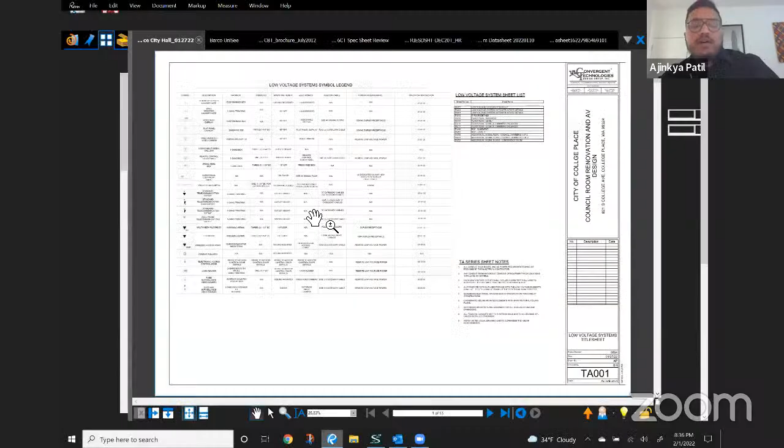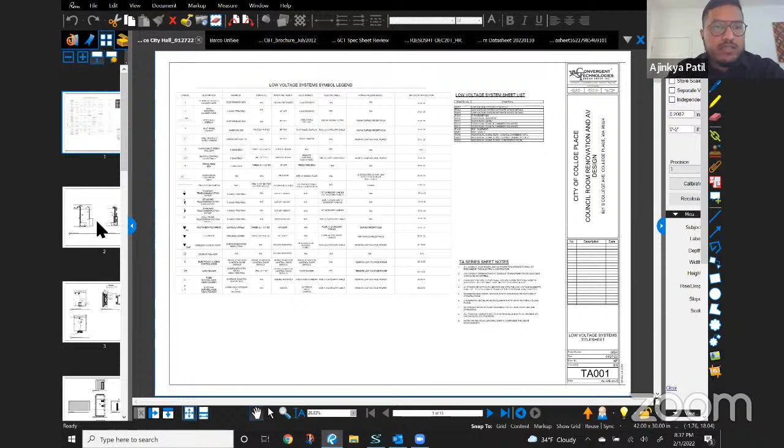Yes, these are the progress plans we currently have. We're calling it the 60% set, so there's still some back and forth and review process remaining until we finalize the AV design. Today I'd like to walk you through the technology upgrades we're planning for this building, giving a brief overview without getting too technical, but covering all the key features and elements planned for this space. I'll flip through some sheets.

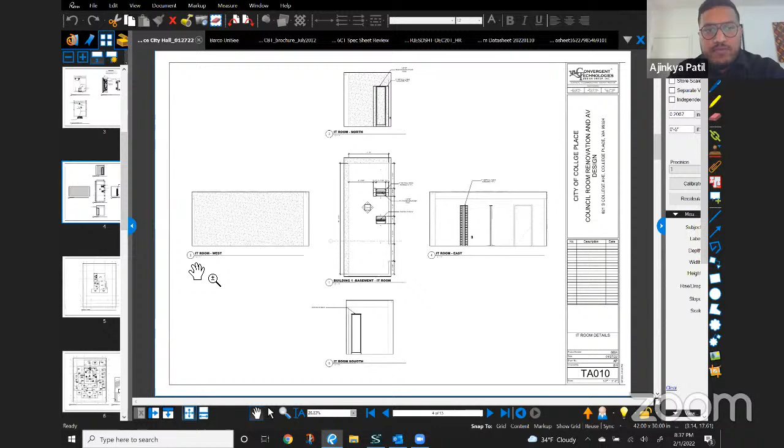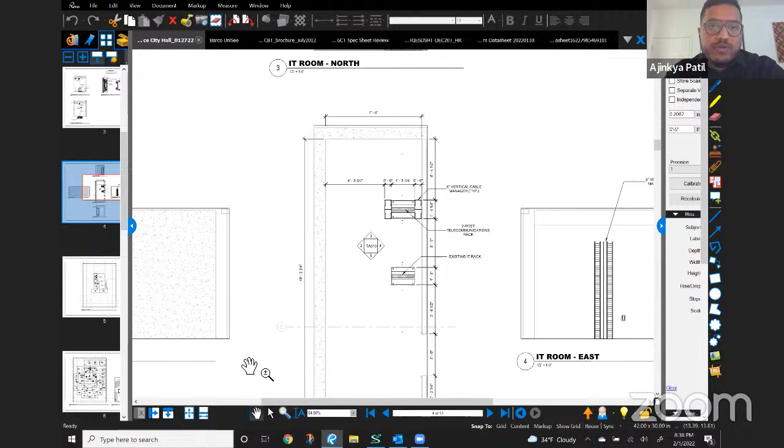Initial drawings show what we call infrastructure details—how the devices, cabling, and everything would be mounted. This is the basement of the council chambers. As far as technology upgrades in the basement, we're planning new telecom data cabling in the office space, storage spaces, and training rooms. We're also planning to upgrade the existing telecom room to support all the new cabling, up to the latest Category 6A cabling standard we're planning for this project. This is the telecom room with a few details regarding that.

For this project, we're planning to add new telecom cabling to all the offices and surrounding spaces across the council chambers, which would support cabling for computers and phones. We're also planning for wireless.

Mr. Patil, could we interrupt real quick? We have a council member who has a question—can you zoom in a little more? I realize we won't be able to see, I couldn't read anything. Thank you. No, good point—I was trying to keep it big and then get into individual spaces, but that's fine too.

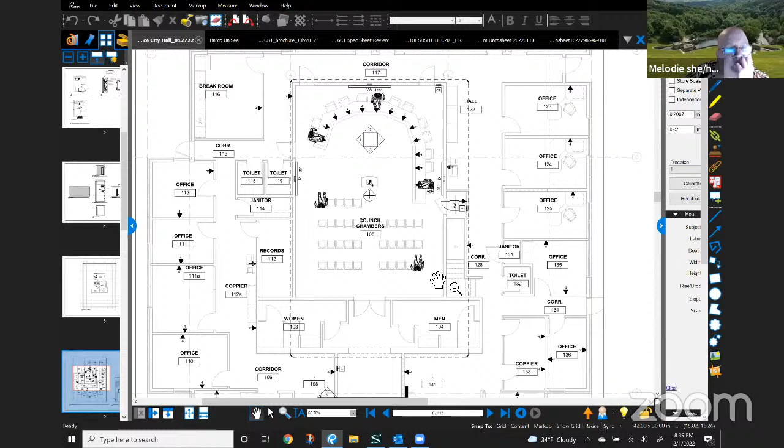As part of the technology upgrade, as I was saying, we're planning new cabling in all the office spaces to support your phone and computer systems. We're also planning to upgrade the Wi-Fi capabilities within the space by installing new wireless access points, so you guys will have better wireless service.

The key focus for the AV technology upgrade is obviously the council chambers itself—that's part of what we call phase one. There's also an AV system planned for the conference room behind, which I believe is part of phase two. That being said, let's get into the council chambers itself.

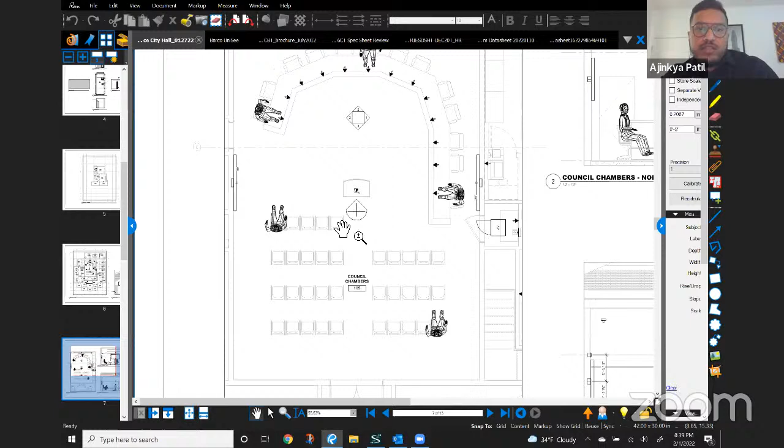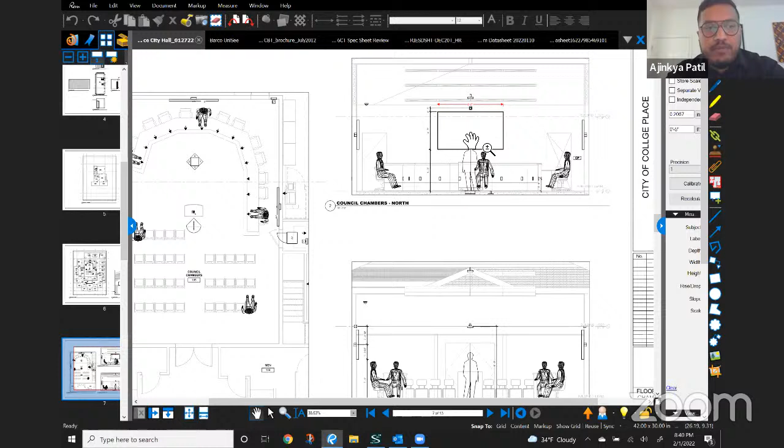Working along with the architects and coordinating the different architectural and MEP coordination for AV, what we're planning for this space is one large primary viewing surface, or video wall, in the front. That would be the main display showing your presentations, camera feeds, or any other slides you want to share. We're also planning two supplementary displays on the side, which can show either different presentations, different content, or share the same thing as the big wall—these side displays help people sitting in different areas get a better viewing angle. So these are the three main display surfaces within the space.

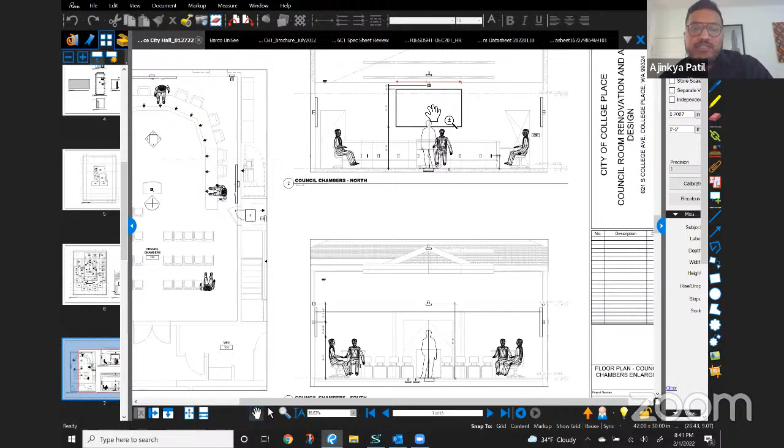The front wall, dimension-wise, is approximately 8 feet by 5 feet—it's actually 4 displays tiled together to form a large viewing surface. The side ones are 85-inch diagonal flat panel 4K displays.

For displays, we're also planning one within the lobby outside, shown on this sheet. This lobby, right as you exit, will have a display that acts as an overflow display if there's a large gathering and people are waiting outside. Any feed or presentation happening within the council chambers can also be shown on this exterior display—that's another viewing surface we're planning for the council chambers.

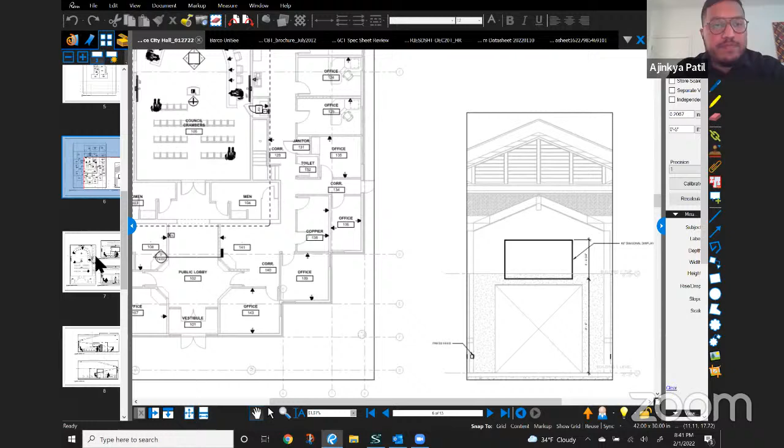From an audio perspective, we are planning for each of the council members' seats to get its own dedicated microphone. It would be a conference delegate microphone chairman delegate system, so you would have the ability to control your own mic and also have a small viewing surface so that any presentation shown on the large screen will also be shown in front of you. Each seat will have its own small display, which we're calling an individual display.

The clerk seat will have its own dedicated inputs and multiple monitors to run the different sessions that happen within these chambers. That seat will also get its own set of control panel and inputs from an AV perspective.

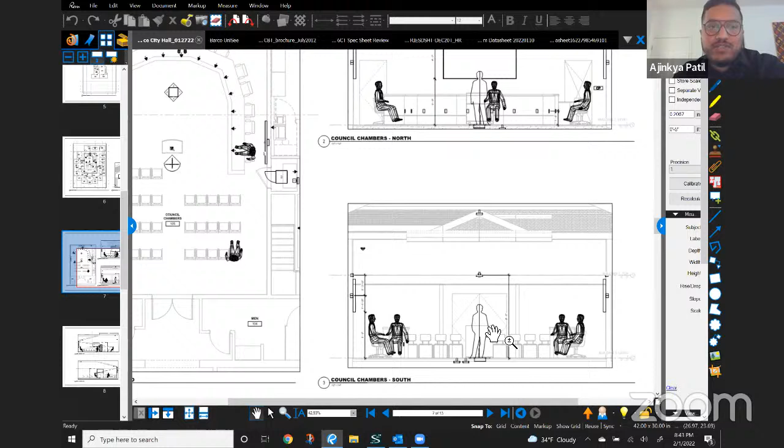In the middle, for someone standing there, we are planning for an integrated AV lectern. That lectern will have its own microphones and input source capability for someone to either present or talk standing at the podium. That podium is planned to be portable in nature, so if there's a scenario where you don't need that podium there, it can be moved out of the way, and we'll plan the infrastructure so the cables can just be disconnected and you'll have a floor box with a cover on it.

From an audio speech reinforcement perspective, we are planning for ceiling loudspeakers and also front wall loudspeakers, so that whenever someone is speaking, the speech can be amplified so everyone within the space can hear clearly. Also, if there's a presentation with audio playback, that can be heard through those speakers as well.

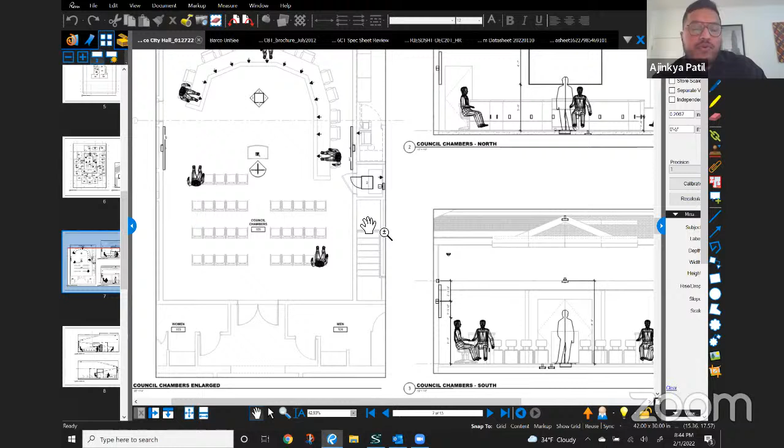For the AV system, we are planning on integrating a small AV rack, which will house all the centralized AV equipment so that it's out of sight and out of the way. It will have its own door, so that once the system is completely installed, you would not have to worry about it day-to-day. Only when it needs some sort of service or updates would you go within the AV rack.

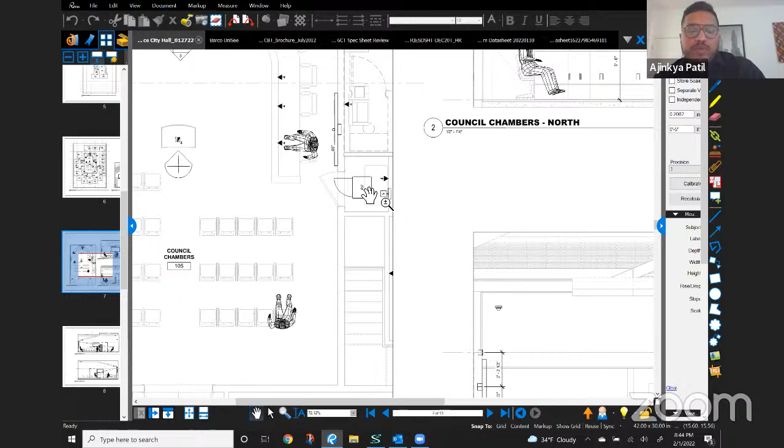For cameras, we are planning at least 3 cameras in this space, so we have multiple angles and different views for each of the council members. We are also planning to integrate video tracking technology within the AV system, so the camera automatically focuses on whoever is speaking. That is something also we are planning in our design.

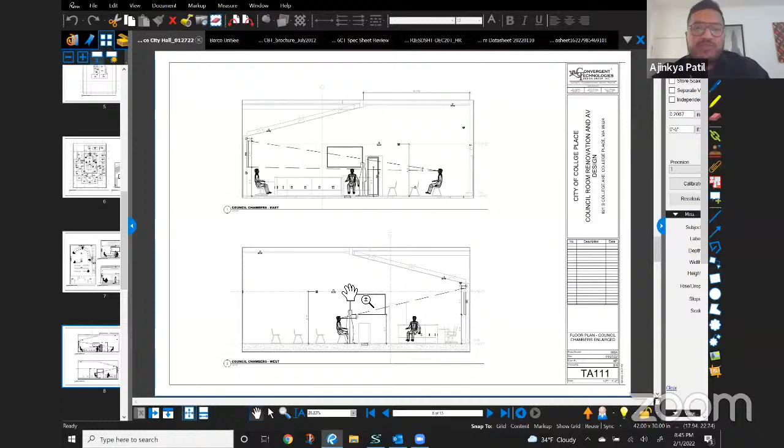What you're seeing here is something we call sightline analysis, which we do as we develop these designs. We make sure the displays are mounted at the right height so no one coming in front of a display or sitting at the back gets interrupted by someone sitting or standing in front of it. We also ensure the displays are mounted at the right height so nobody has to strain too much to look up high or otherwise. We keep all those things in mind as well.

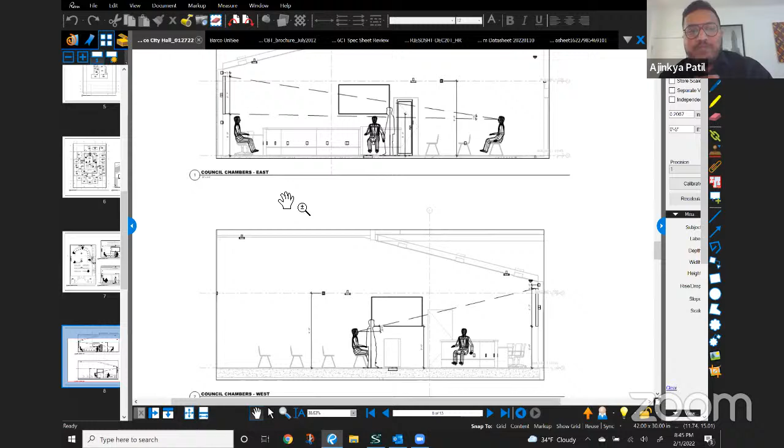The main functionality that the AV system within the space will allow is the ability to present, including wirelessly. So someone with an iPad, laptop, or phone should be able to, with authorization, connect to the AV system within this space. You would also have the ability to stream and record any of your sessions. These were a few pointers given to us during the AV design user group meetings to work the design around, so the AV system would be functional and capable of streaming and recording as well.

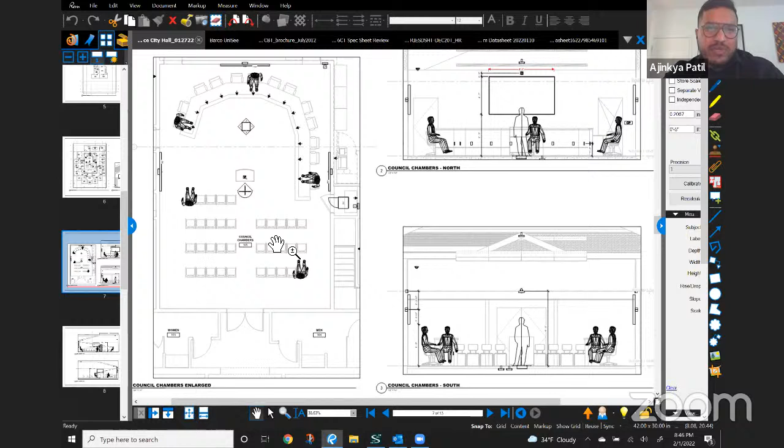Any questions up to this point as far as the council chambers? Any questions? Oh, Ms. Selby.

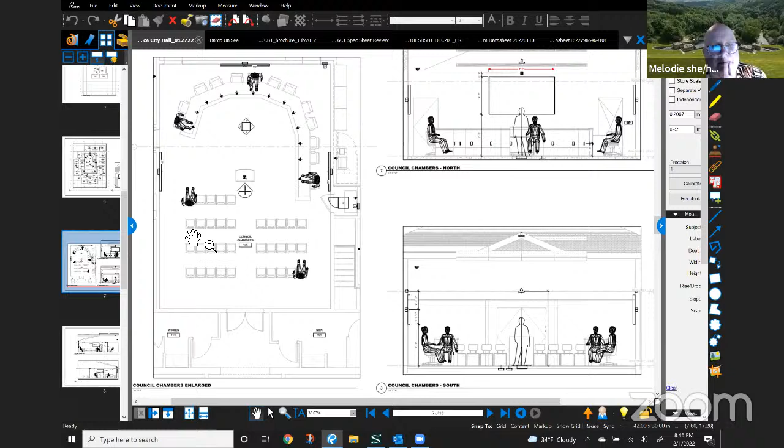This sounds great. The council seats, I've seen them sometimes rearranged for different meetings. Will these be fastened in place, or will they still be able to be rearranged?

That one's probably more for me. The dais is intended to be built in place. This was a uniquely shaped space - given the amount of space we had and the amount of seats we needed to fit, we couldn't really find a store-bought item that was going to work, frankly, and have proper exiting spaces, room behind the seats and all that. As you can see, it already takes up quite a bit of room. So no, these are not designed to be moved, the dais or the semi-roundish seating.

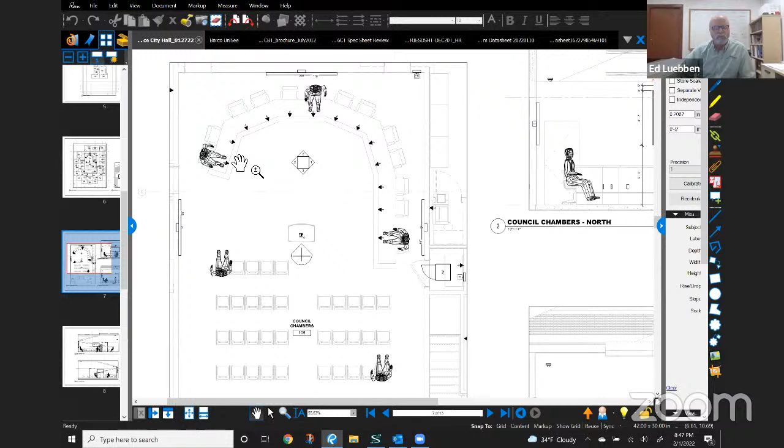But there are portable chairs out on the main floor, so chairs and tables could be set up there for workshops. Okay, thank you, I think that's fine, I just wanted to know which way it was.

And as far as the individual displays, will we be able to zoom in and out of those ourselves so we can zoom in on one piece or something? That is correct.

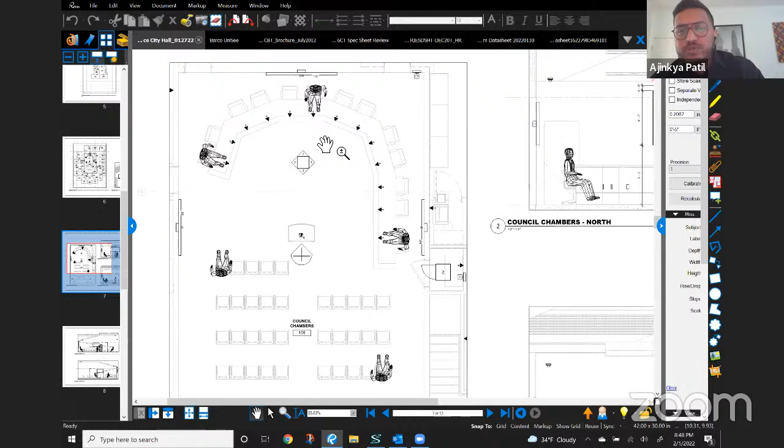During the user group, we had the discussion about the displays. Right now, the individual displays would be controlled by the clerk, so any content being shown on the displays is controlled by the clerk, but you should have the ability to individually zoom in or zoom out of any documents you might be seeing. So you should have that ability.

Are the audio systems we're getting going to be compatible with hearing aids, where people can tune in somehow on their hearing aids? That is a great point. Yes, we are planning for an assisted listening system for this space. Anybody with a hearing deficiency, we are currently planning for an IR-based assisted listening system. You will have receivers distributed if and when those are required, and that person can just use that receiver to engage with whatever audio is being transmitted in the space.

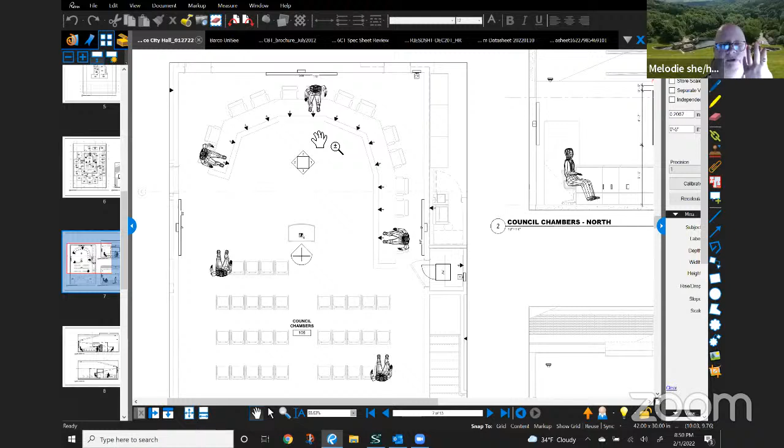That's good. I don't know much about it, but I would like if we could find out more about working with hearing aids, because I know there is a way that if you already have hearing aids, the IR things sometimes don't work that well, and certain audio systems work well with them and certain don't, but that's as much as I know. I just want to make sure that as much as possible, anybody can have access, equal access. That's great feedback. I know there are these telecoil systems that kind of work inherently with hearing aids, so if that is a requirement, we can definitely integrate the assisted listening system to be compatible with those. I don't want to double the cost of it if that's what it takes, but I do think it's something we need to look into. Thank you.

Councilman Peterson? Yeah, it sounds like a really sophisticated system, so I have a kind of basic question. Many times we go into executive sessions and have to kill the output, and then many times we have to communicate out that we need an additional allotment of time. So obviously that's being built in or thought about as far as a quick kill switch, rather seamless communication in those types of scenarios.

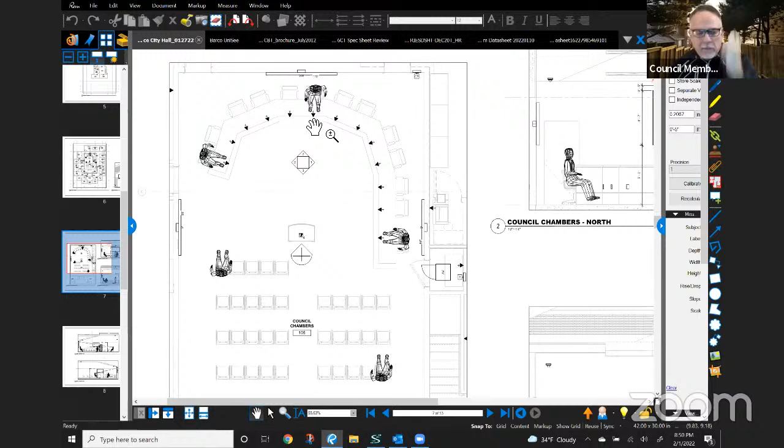Yeah, absolutely. The way we are designing the system, it is really flexible. We are planning for two main control panels or touch panel control surfaces, one at the clerk's desk and one as you see here behind. They will have integrated presets, either a single push button turning on the system, or if you want to generally mute all the microphones or kill all the video feeds, you can have dedicated buttons so with a single press your AV can be cut out from the exterior world, or if you want to mute internally, you can do that as well. Thank you.

The way we are writing the spec and what we are expecting from the AV contractor, once the contract documents go out and we have an AV integrator on board, is that creating that touch panel user interface needs to be an iterative process with the end users for this council chambers. So you will have multiple chances to review the look and feel of that touch panel, so it's not just something the contractor provides. It is what you guys actually want.

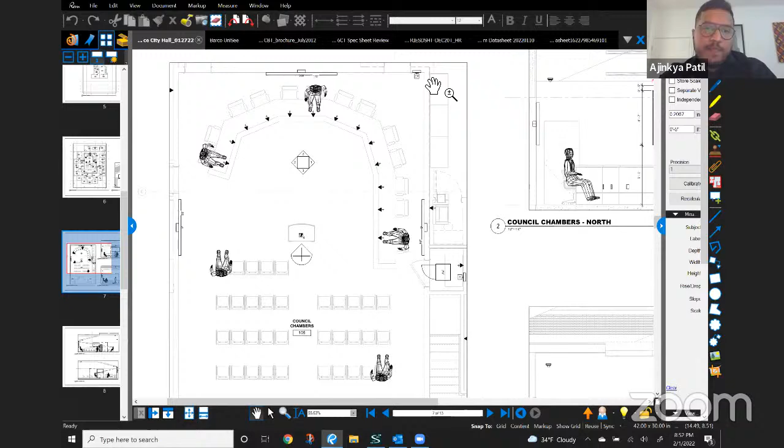One thing I missed: in the lobby itself, we are also planning for a sort of press feed. That would be physical connections on the wall in case there's a scenario where there's an OB van or a broadcast type requirement, so that a feed from within the council chambers is required outside. We are at least planning for that infrastructure so you can get the video and audio feed from the lobby, and nobody has to come all the way into the room running long cables.

The lobby would also have ceiling mounted speakers for overflow audio, in case there's a large gathering or session and people standing in the lobby can still hear what's going on inside. The way we are designing it, it is on its own separate zone, so you turn that on only if it's a requirement, and if you just want to keep the session within the chambers, that can be done as well. The lobby speakers can be segregated.

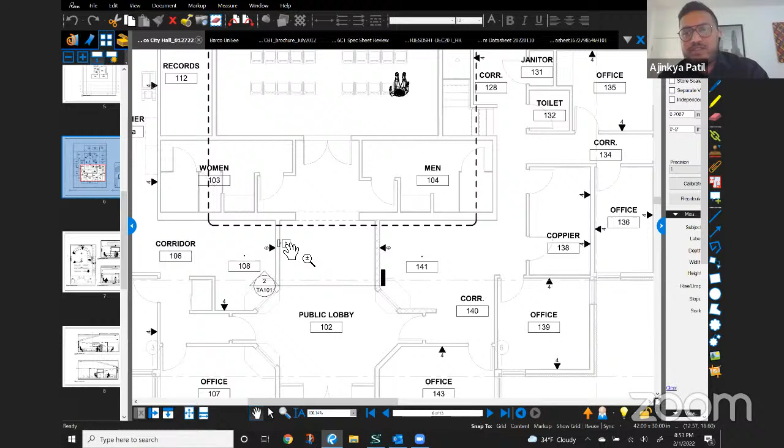Any other questions with regards to the AV in the council chambers? I wanted to quickly touch base on the conference room as well and what we are planning for that. I do not see any other hands raised, so thank you.

I think I had one question. How will the system integrate with Zoom and our board docs? With Zoom, it should seamlessly integrate. We are planning for all the AV feeds to go through an AV bridge that integrates the HDMI, SDI, and line level or mic level audio into a single USB feed. That would connect to a PC within the AV rack, which is the computer the clerk controls or runs Zoom meetings on. It would detect it as a microphone and camera, and you'd still be able to pick and select which camera goes to the Zoom session.

Great. So for conference room 120, as I said earlier, this is part of phase two, but we are planning for a straightforward and easy to use conference system with a single large format display up front, along with a wall mounted camera in the front and ceiling mounted loudspeakers and microphone, so you can have your regular Zoom meetings or sessions in there.

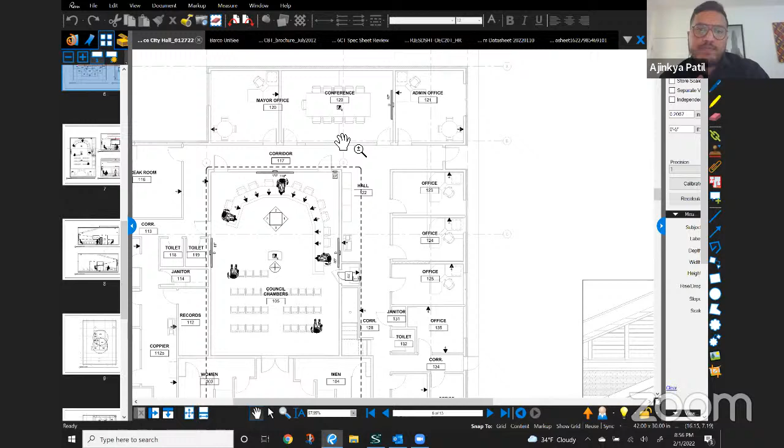We are also planning to provide cabling infrastructure for new security cameras in this building, which is something we are capturing as part of this technology upgrade. Those security cameras would be primarily on the exterior and in the lobby, but not in individual offices. Glad about that.

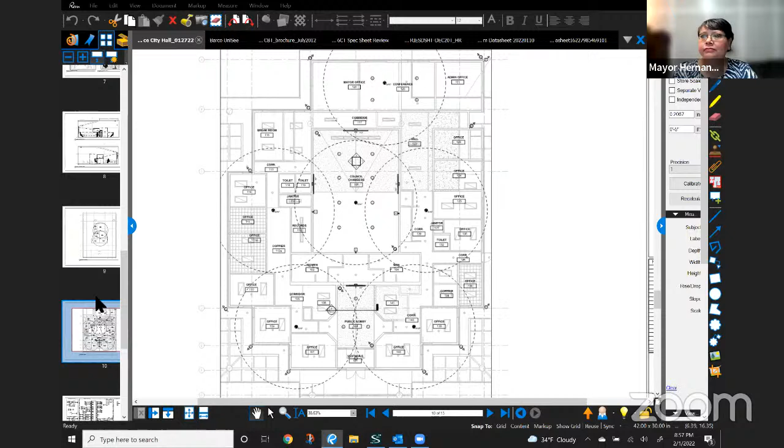So, will it be a problem if -- sorry, I'm trying to figure out how to say this. Right now we have our Chromebooks so that we can look at other stuff that's on board docs rather than what's being displayed right now. Will those still be able to be part of the system and be plugged in, or would that overload it?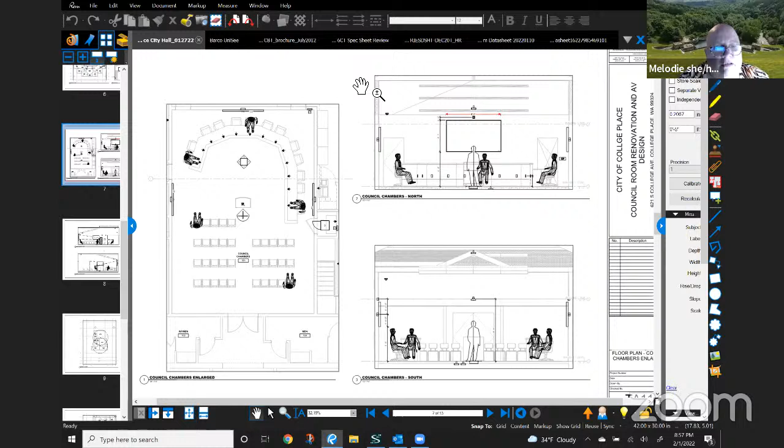I would still think you'd be able to use your own Chromebooks with BoardDocs, if I'm correct. We are just not planning for any individual inputs at the station. So if you want to share from your laptop, we are not planning for that, unless that is a requirement -- you guys can let us know and we can include that ability as well.

I don't see the need to share, but I do sometimes like to go back to maybe a couple meetings back, or what did we do last year. I don't expect Lisa to pull that up and show everybody -- I'm just trying to see if I can answer some of my own questions or remind myself.

So my second question, and this may be irrelevant in this day and age, but do we have the ability to bring in TV, like if there's breaking news or documentaries, or whatever, sometimes we want to bring in TV to conference rooms, etc. Does that all just come over the internet now? So as long as we have internet, we have that?

I think so, that's the main plan. If you guys have any IPTV subscription, we can definitely pull that up. If you want to plan for a dedicated coaxial TV tuner like a Verizon box or something, we can plan for that as well. Jon, do you have any feedback on what you guys want to do for this?

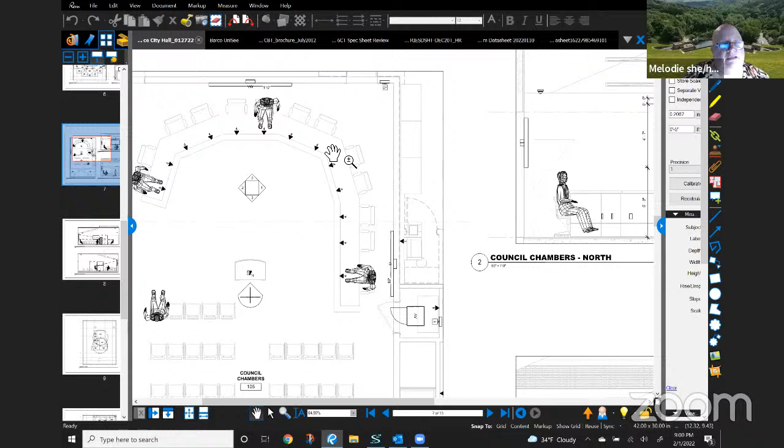No, we still see those TV tuners. A lot of buildings still have physical coaxial connections for TVs. So yeah, that's a great suggestion, we'll make a note of it.

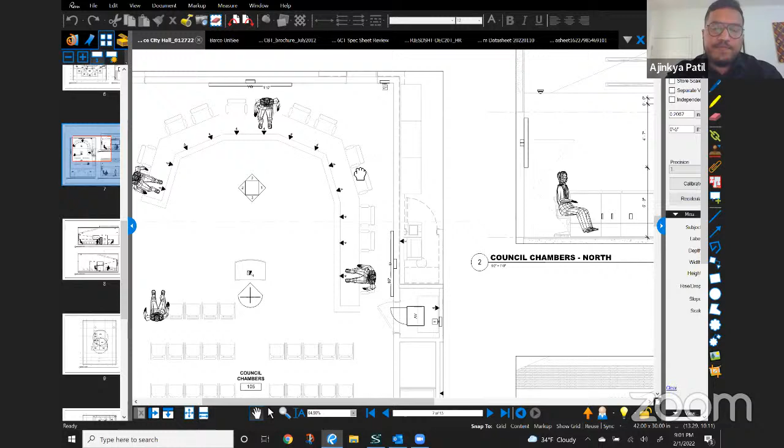Okay, well thank you, Ajinkya. I think, Ed, if we want to go ahead and turn it over to you. Do you want... one thing about...

I am not very technologically inclined, and so I don't know how to share a screen. So I sent those drawings that way. I'm hoping maybe I just have, well, just a few. I can share my screen.

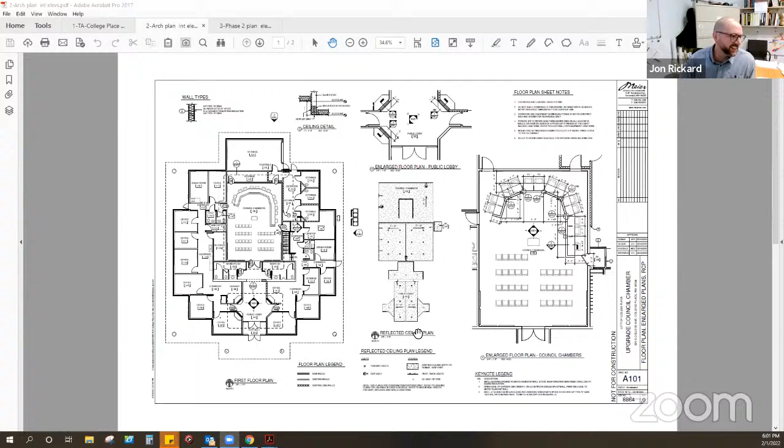This is why Ajinkya is designing that part and his team. You just need to tell me what you want the audience to see. Yeah, that's fine, it's a lot of this you already saw on Ajinkya's screen. I'll just do a real quick overview for phase one, and that's what we have.

We have two drawings that we're sharing tonight that are part of phase one. There's a whole bunch of other drawings that are details and mostly boring for most people, but phase one is we're going to put new carpet and paint, patch some holes in the ceiling because we're going to be redoing the lighting. You might go to the ceiling where you're at right now.

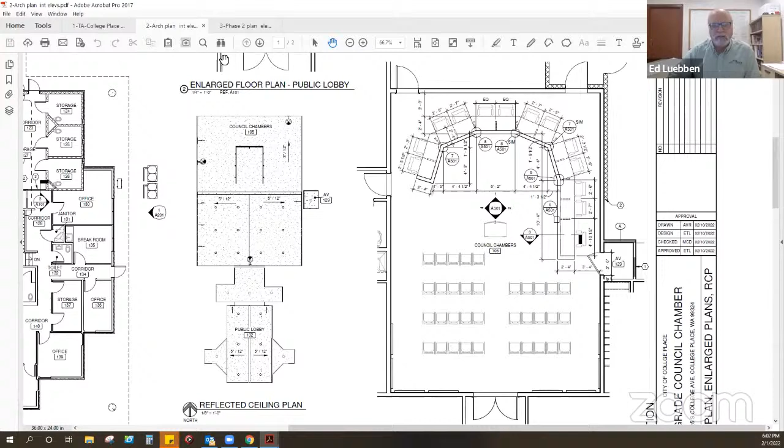That'll be good. This is just a ceiling plan for the lobby and the council chambers. We're going to have the little round circles at the back half of the council chambers, and then in the lobby, the darker circles, not the light ones by the restroom.

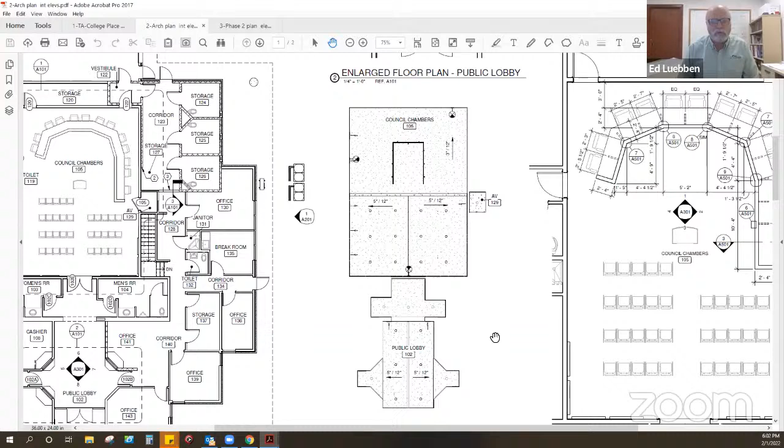Those are going to be kind of long tube pendant type lights, but they light not just down, they light from the sides also. The whole thing is kind of a lens. And then for the council...

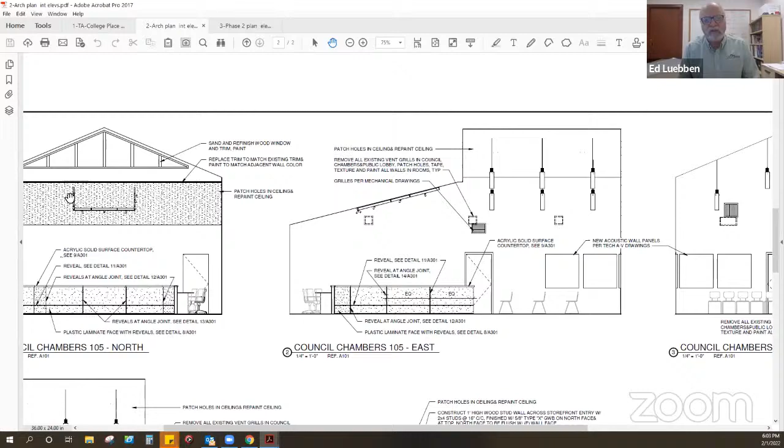Then that's this track lighting that mounts on the ceiling with spotlights, LED lights that kind of shine towards the council, the people at the dais, the council members and others.

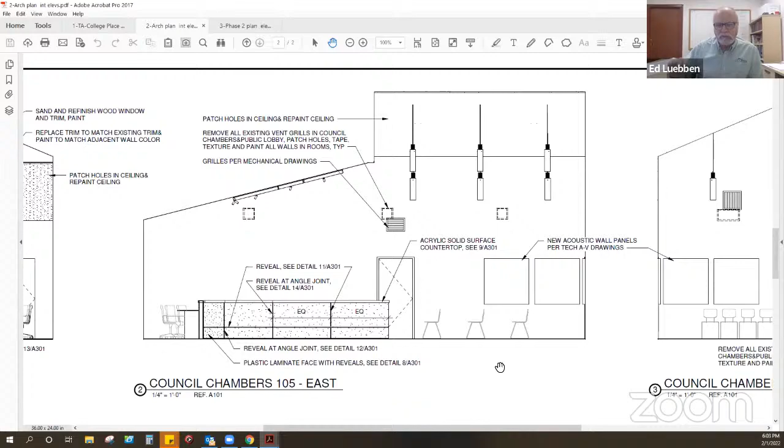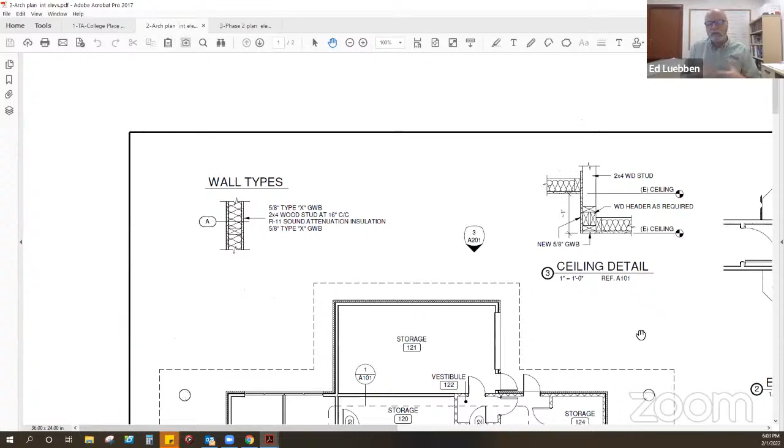And then the other thing that's not mounted here, that we're anticipating having, are little flexible tube lights, flex lights, there's probably a better name for them, on the dais desks around for each of the desk council members and others, so they can bend it and shine on paperwork if they need extra light for reading or whatever. So they'll have that task lighting at each council chambers.

Yeah, task lighting, and we'll have probably a similar task light. It can be mounted in place, or in this case probably one at the podium also, for lecturing there. So that's what's going on lighting wise.

The only significant architectural change going on is, again, we're doing new finishes. We'll talk about the lobby in a sec, but over there where the AV closet, room 129, you might be familiar, that used to be where people used to visit their family members in jail or whatever, or maybe attorneys would visit, I don't know which side of the wall the attorneys are on.

But one thing that John and Scott and others have asked us to do is we're also going to tear out a portion of where that door is that separates the jail from the corridor, 128 and 123 I guess on this drawing. We still call out storage 127, we didn't get it cleaned up, but that's gone. We'll be removing that where the prisoner would sit, or the inmate, whatever the proper terminology is.

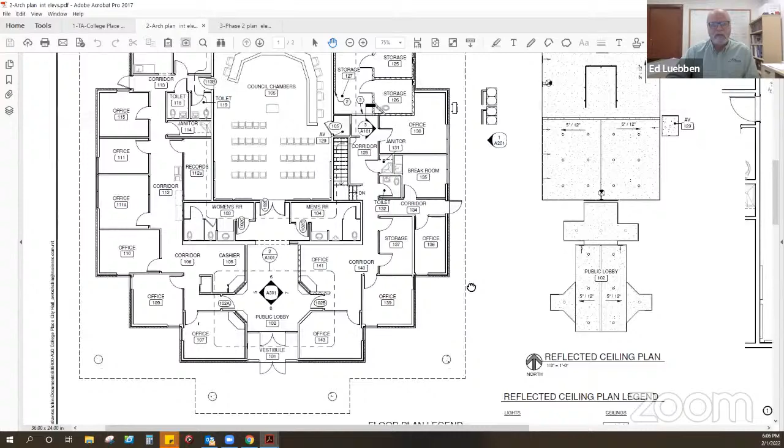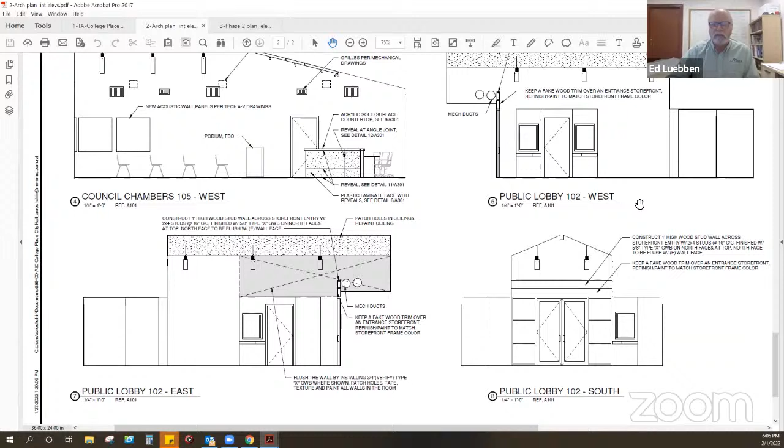In the lobby, the big thing there is, at each of the windows, the counters. We're going to build a new countertop that meets handicap height requirements, which is 2 foot 10 inches maximum above the ground, and keeping, for the most part, the windows. We have to modify one of them, but that's kind of what's going on there.

And there'll be new paint because of that too. We're going to kind of clean up the lobby a bit. We're not doing anything with the flooring, but there's some fake wood trim we've been asked to remove and repair the wall behind that.

John, I don't know if you're aware of this yet, but at elevation number 8, down in the bottom right corner, we're going to have to build a little stem wall on top of the entryway because we're planning on doing it, and it'll be about a foot high. You can see it right there, because of ductwork as part of the mechanical upgrades.

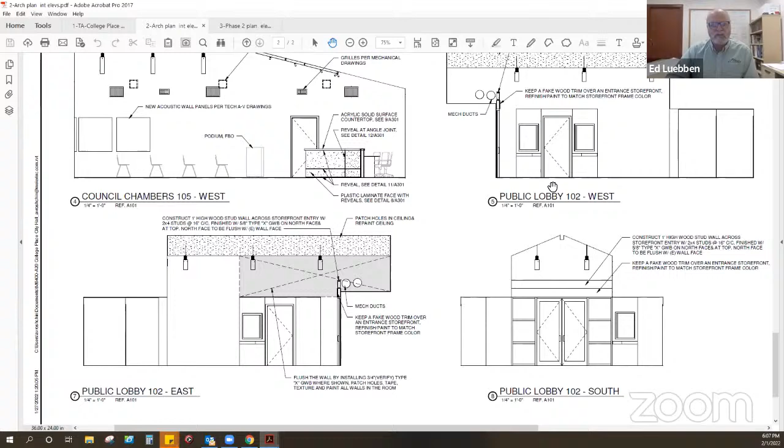There was a hole that needed to be patched. We're going to patch that hole and clean up the entryway just a little bit. It's otherwise mostly just paint and patch, carpet, and a little bit of remodel on phase 1 architecturally.

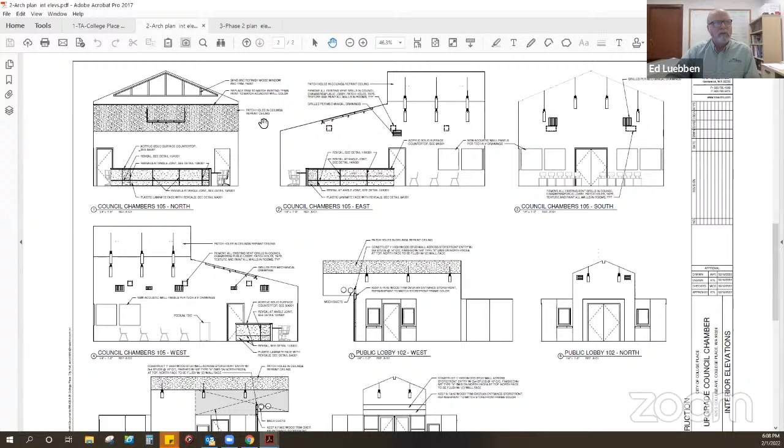Not too much. One of the big projects is included in phase 1, but we don't know if the funding will be there, so we're including it as an alternate. It'll be in the bid: replacing the HVAC for the whole building. We just don't know that the money will be there, and audio and technology is the number one priority. So we're designing it for phase 1, half anticipating that we'll get a price, but have to set it aside until phase 2.

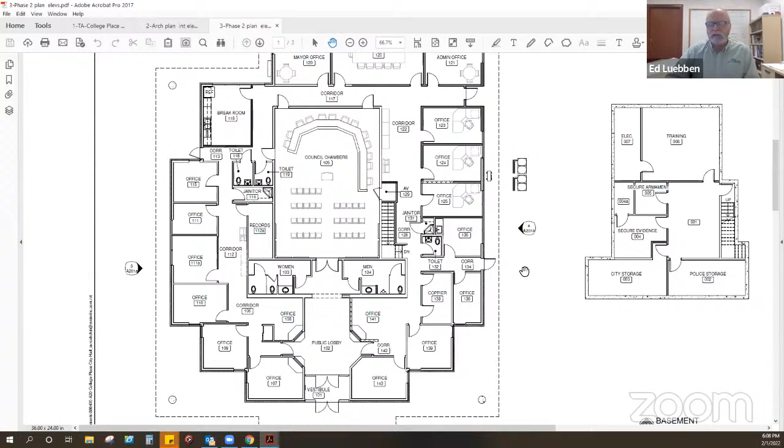And then the second drawing that John pulled up is phase 2, and you already saw hints of it before—taking that old space and kind of filling out one corner of the building, essentially.

Mr. Luebben? Yeah, Councilmember Peterson has a question. Ask away. Oh, no, it's kind of general—back to the seating for the council.

You've already stated that it's kind of permanently fixed there, and I just wanted to revisit that quickly. Maybe this is more of a question for Lisa or others also. Have there been times when we've needed to clear that area out for some other activity? I understand, I don't have a strong position, I can go either way on this one. I really don't, however it turns out, but I understand them being custom built and whatnot. Is there a need for this to be able to be slid against the walls for some other activity, and maybe people that have rearranged the room could comment on that?

Yeah, I'll go ahead and take that, and if Lisa wants to add to it or anybody else, that'd be great. But we've had discussions about this. We really prefer a fixed seating area, primarily because of the technology that's going to go into it, and it's rather labor intensive to set that equipment up every single time anybody goes into that room and moves things around to their own desire. So it's a staffing issue in order to get that room prepared for a public meeting. But also it's hard on the equipment every time you're unplugging stuff. In the past, we've found that if microphones and speakers aren't in the right spots, we end up with feedback. And this is going to be at such a different level of sophistication in terms of the equipment that we're using, we really do not want to be moving this stuff weekly, bi-weekly.

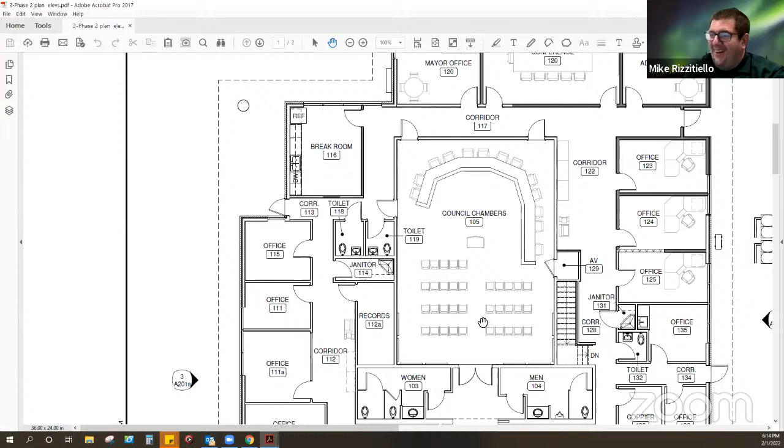I can see that, that makes sense. I guess I'm still back in the everything's-so-breakable stage, but I see what you're saying. That makes sense.

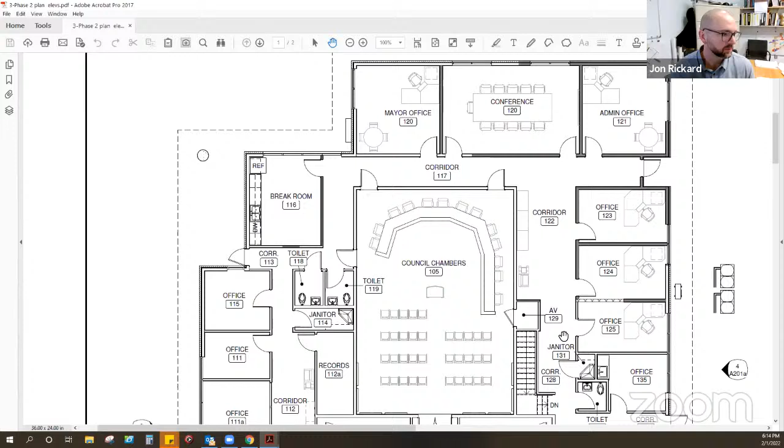One nice thing, though, is there's a good chunk of the room that's pretty flexible, like Jon mentioned and others alluded to, tables can be set up for staff meetings and such, ignoring the back half of the building which right now is a garage, and for breakout. Those chairs are portable and can be arranged all sorts of ways for groups and such.

So Ed, would you like to go ahead and give a little overview of phase 2, maybe starting back here?

That's kind of why we included that, because part of phase one, ironically, was that we were asked to go ahead and develop the layout for phase two. This way our mechanical design, and as Ajinka alluded to earlier, their technology design, can be designed to accommodate what's coming down the road.

So you can see we're more or less taking the jail cells out and cleaning up that hallway a little bit, and we're able to add in three offices. I think 125 was sort of a two-person office before, with an L shape, and it'll become more rectangular. Then these two offices really take up most of the three jail cells that we have. And then a new administrator's office and mayor's office and the conference room.

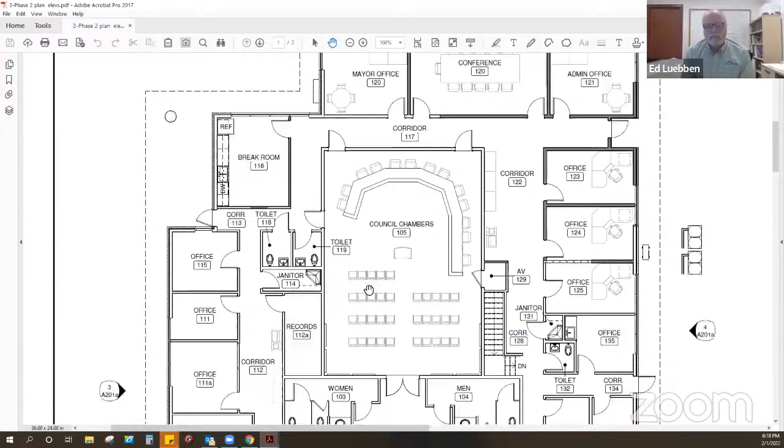The break room is a little larger now too, and the mayor and administrator's offices are large enough to have conferences in. So more flexibility - we felt it was important for both the mayor and the administrator to have a conference table in their space.

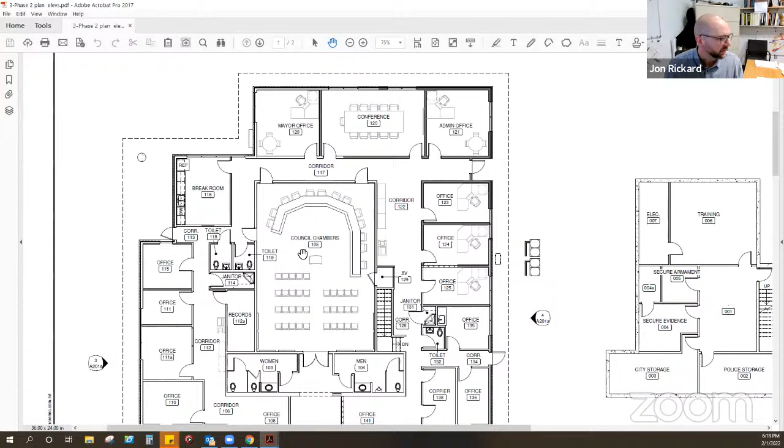I think, Ed, do we have some exterior renderings? There we go. I think we have, at least on one of the drawings, now and future. That's more or less now. Yeah, that does it. We've got the 3D phase 2, and above it is 3D phase 1. So there's existing, and there would be the addition.

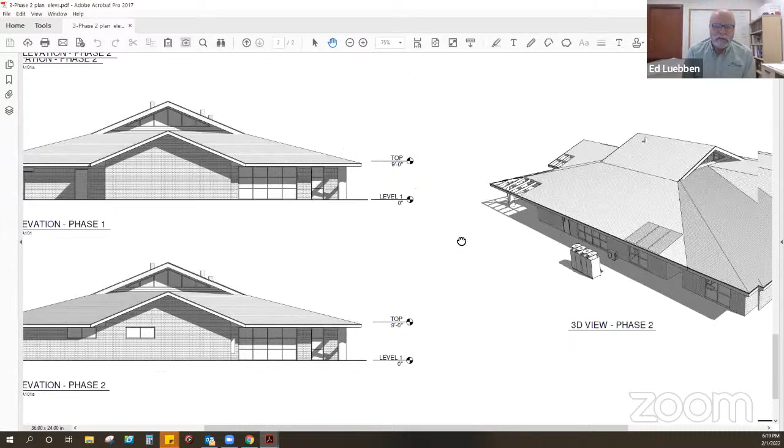And those big things sticking out that are new that you might wonder about - those are part of the new HVAC system. We don't have it drawn in here yet, but we'll be creating a little island for those to sit in, off of the sidewalk. There really wasn't a good way to set units on the roof - it's just not the kind of roof that lends itself to that.

So we picked a spot that at least isn't at the main entry and isn't on the street. It's actually across from the trash container area, which our mechanical guys always call a place to put the uglies. I try to figure out why they call them the uglies, but anyhow, we have different perspectives.

Okay, any last minute questions about phase 2? Doesn't appear so.

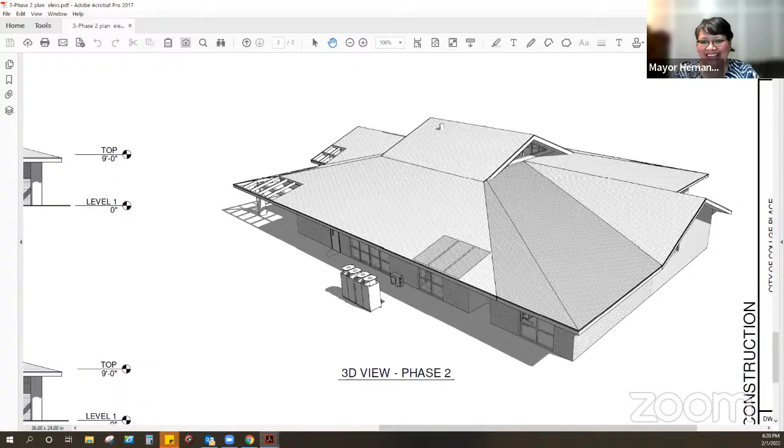Very thorough, thank you. Thank you very much. Thank you, Ed. Thank you, Ajinka, if you're still with us - he's back east in New York, so he's probably getting ready for bed. Is that officially the end of our part? Yes, I think so. Thank you very much, okay, all right guys. Thank you, have a good evening. All right, thank you guys. Bye-bye.

Okay, let's move on to the tax increment financing, also known as TIF, by Ms. Culwell, and Mr. Rizzitiello will be presenting.

I'll introduce this and then turn it over to Rea. Up until the last legislative session, we were the only state out of all the rest that did not have tax increment financing as an economic development tool. After much lobbying for many years, the legislature finally adopted some semblance of tax increment financing, which allows the city to get ahead on the bandwagon and help facilitate development via public infrastructure investments, studies and so forth on potential future projects. So it is legal now - we can do it. We're on the frontier of this because it's so new. The only other ones doing it right now are Pasco, and I believe one other one on the west side. So with that, I'll turn it over to Rea about the legal ramifications and the like.

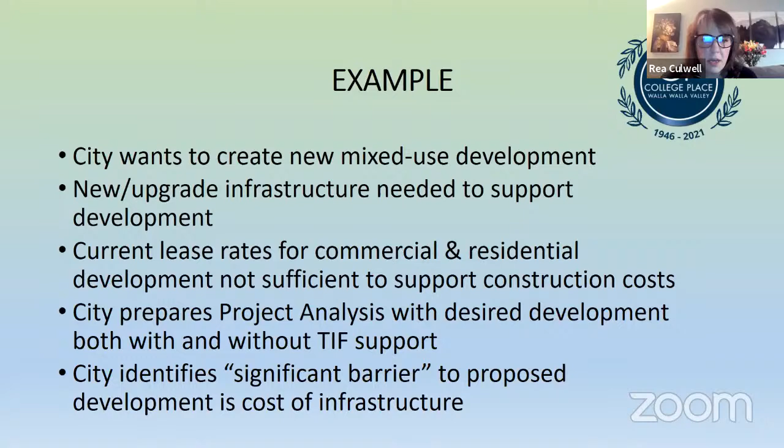And let's see, so here's an example of what a project analysis might entail if we were looking at putting in multifamily retail space. We would pay for the infrastructure and then the development would come.

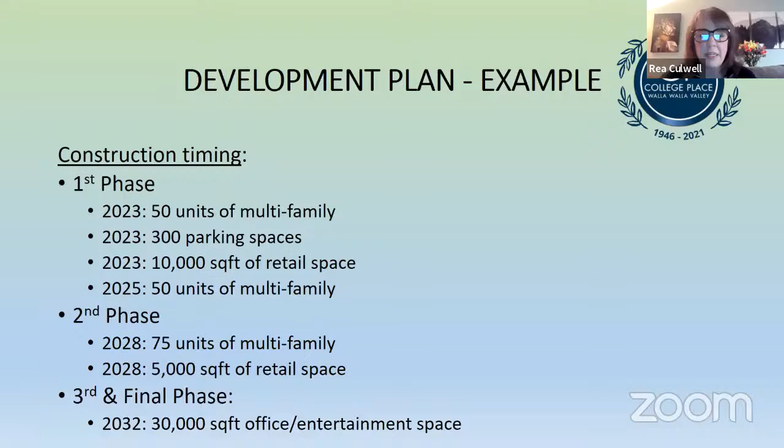All right, I think that's it. I plowed through it. It's a lot of information, but the nitty gritty is it's a tool to raise revenue.

And I would just add that back in my prior lives in Illinois, when I worked at Council of Government, I was a tax increment finance administrator there, and then in the City of Beaverton I ran their urban renewal program, which in Oregon they call it something different, but it's the same thing. It's urban renewal there, but here, and most everywhere else, it's tax increment financing. So we'll be looking at doing this study in-house just because of expertise, because this is so new. The state doesn't really, there isn't really the consulting breadth that's developed yet here in this state.

All right, thank you for that. You made it sound, I'm gonna say you made it sound so easy, but I gotta admit, I've been spending months watching YouTube videos on how TIF works. But Councilmember Espinosa has his hand raised, and then Councilmember Selby.

Thank you, Mayor. This is a question for Mike and Rea. So the way that I see it, this is a way to accelerate growth for our community through projects and infrastructure development, correct? Correct.

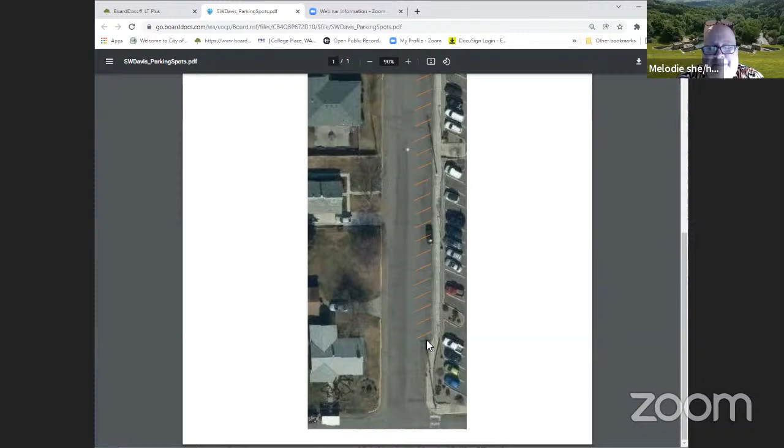The city of Olympia put some in a few years ago, and everybody was against it at first, then everybody was like, oh, this actually is kind of good. So they might be a place to check with.

Yeah, we definitely can. And I would also concur about the sentiment of the university not following the parking signage. There's enough new members on this body where you may not be aware of this, but this probably goes back 3 years. There wasn't signage around the university parking lots, and we were getting a number of complaints from residents living adjacent to the university. There was an item workshop probably back in 2017 or 18 about doing a parking district where residents would get a free tab or permit to put on the windshield, and everyone else would have to pay somehow. The university requested we step back from that because they were going to do the parking lot assignments, so we essentially held still on that. I've communicated to them that my cursory review, along with residents indicating concerns, shows it does not appear to be followed.

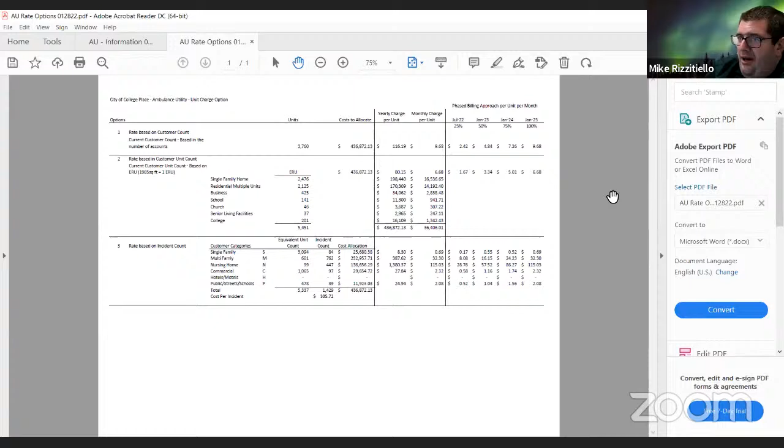16% of our property is non-taxable for the university. Yeah, there's quite a bit of property that you would think is in private hands, but it's rented out, but they own it. Okay, thank you.

Councilmember Peterson? Well, yeah, I guess I'd go back one question. I would suggest that your ambulance runs are up because of COVID patients. Is that correct?

It's a small factor. Surprisingly, we don't respond to very many COVID people anymore. We just have a really sick population, and some of that might be because of COVID — they didn't go seek help or couldn't go seek help. Sure, and right, and now that has escalated. Yeah, as hospitals are on divert during this time, right? Yeah, okay.

So if I look at this, you have a title that says church. Is that all encompassing of all churches, or how does that work? Yeah, that's all churches. I could provide you guys a complete breakdown of that.

No, I still have some serious problems with the square footage for the college. We've got college — it's going to be 16,000 and north of that, for a limited number of ambulance runs, if I understand correctly. But meanwhile, we've grouped all churches — I mean, all schools — in that category. So those schools are being split among 2, 3, 4 different schools? Churches, what, 4 or 5 different churches, perhaps?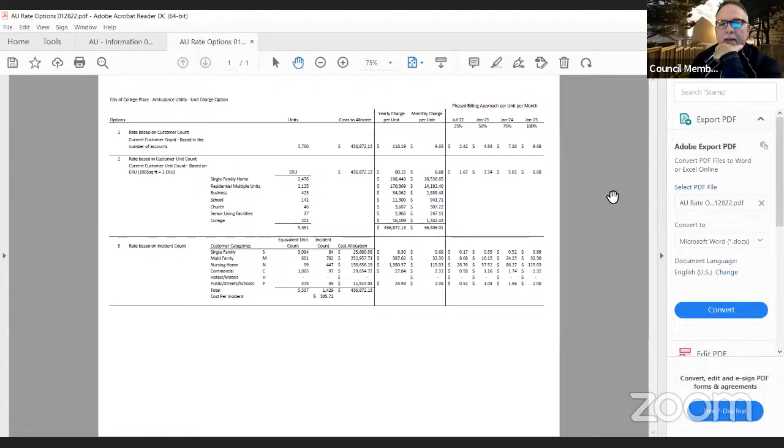Maybe if that's something you need me to do. I'd like input from the others too on the council, but it's one of these things where we've got a situation where there needs to be some adjustment, I think, when you're talking about one entity versus multiple entities in the actual annual impact. But anyway, that's just my thoughts on that.

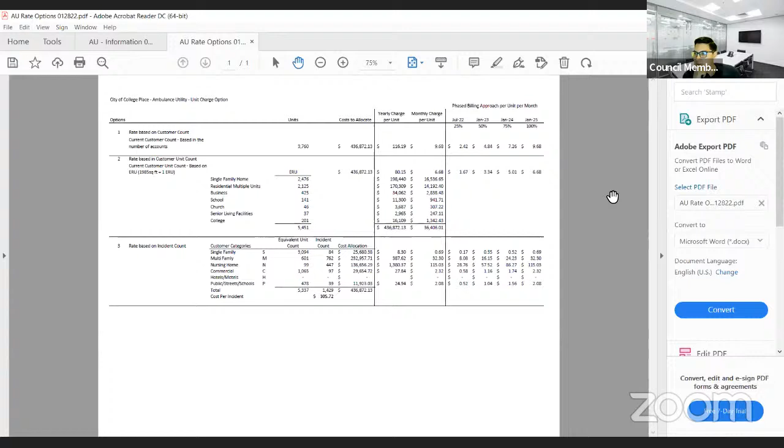All right, Councilmember Espinosa. I'm just thinking about the whole situation. I'm leaning more towards Model 2 and Model 3. I think it's a good discussion, and I'll keep thinking it over. Thank you.

Before I go to Councilmember Selby, Councilmember Cleveland has his hand raised. Just a very quick thought.

One thing about Model 3 is Brian was saying it's based on incident count. I would worry there would be pressure for people to not use the ambulance, like, well, maybe there'll be a fine, let's wait another 20 minutes and see if they'll really be okay. Maybe people do that to some degree otherwise, but for a business like nursing homes, that's going to be a pretty substantial cost they'd be bearing. So I'd suspect there'd be a lot of unspoken, and maybe even spoken, pressure to not call it for this person, let's wait an hour, see if they get over it, because this has happened before and then they die. So just something to consider.

I also worry there are inequities to that, because lower income people tend to be more sick because they have less access to medical care, so they may tend to need city help more. Also, our senior citizens who are on fixed incomes, it would also be an added potential burden to them as well. That's what worries me about number 3.

Ms. Selby: No comments, I think you guys have covered it pretty well. Ms. Sherman: No questions, thanks.

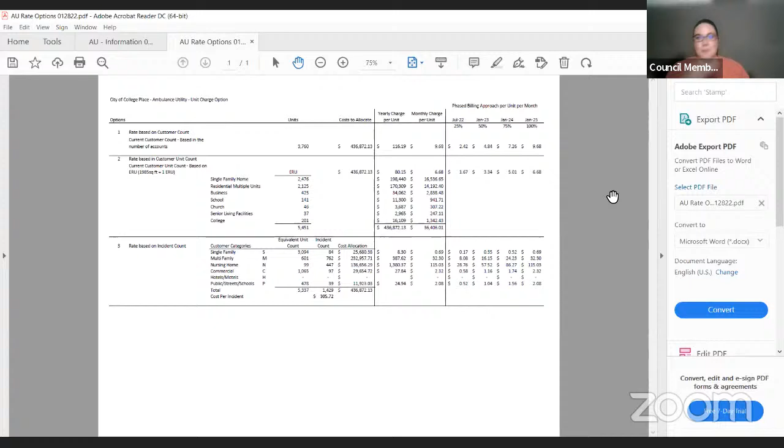Ms. Boyle: So Chief Winter, what I heard you say is based off of these last 3 or 4 days, things have slowed down and maybe we don't need this. Totally kidding, totally kidding. No, I don't have any questions. This looks really good. I really like how you've set up option number 2, some play there maybe with the college. We've talked before about how if we went with Model 2 and, for example, the college had a concern, they would have some time there to appeal it and maybe some wiggle room that we could make adjustments. So I think this looks really, really good. Thanks.

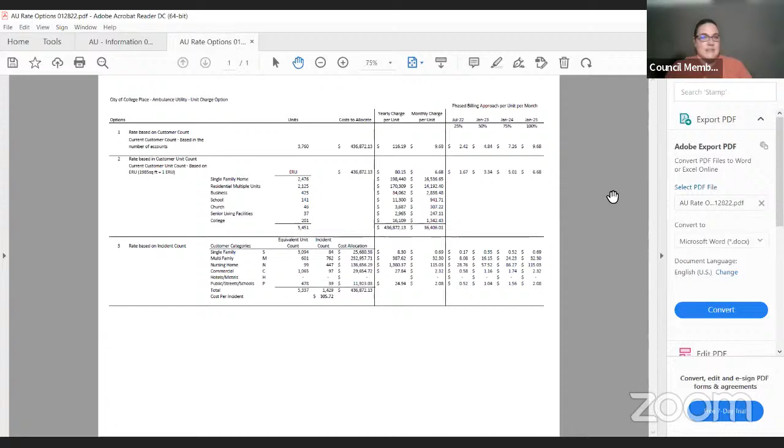And then my last comment is the college does continue to buy up properties and take them off our tax rolls. So they do have empty buildings or empty spots, but they're still adding more to their inventory of buildings and taking them all off our tax rolls. That's where I kind of struggle with their contributions to our budgets and our needs. Every year we're losing more and more money on our tax rolls as they pick up commercial and residential buildings. My last 2 cents. Any other comments on that?

All right, so if there's no other items for good of the order, do we have a motion to adjourn?

Councilmember Selby: I do have one quick item, which is as of a couple days ago, I think all the paperwork is done, and so I am now Melody Williams. I'm still waiting on my driver's license, so it'll be a little bit until that gets through all the city paperwork, but I'm Melody Williams now.

Well, now I'm going to have to call you Miss Williams. It took me long enough just to remember to call you. You can just call me Melody, that's not changing.